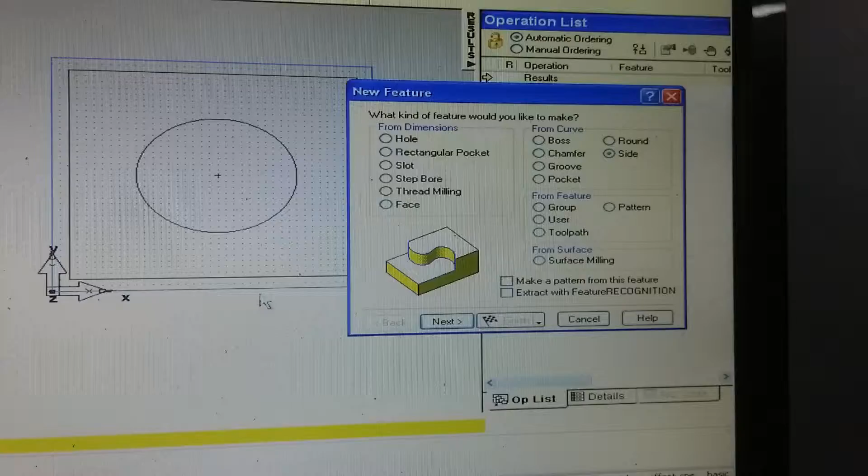Right, like I said, you're going to create a new feature. It's going to be from a curve because it is a curve. I mentioned earlier about doing a groove cut, which you could probably do, but a side cut is essentially what you want to do on this one.

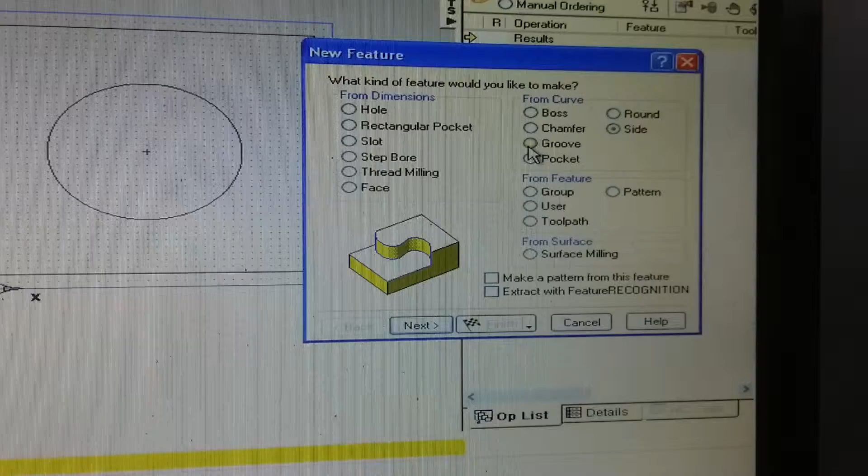It will allow you to use a regular end mill, because when it's cutting a groove, it's thinking it's going to be engraving or cutting a keyway. So click on the side, click next.

Now this is asking you to pick what you want to cut. So you click here, you click on your circle, it highlights it green, okay? It calls it circle 4. I don't know why, but you can rename it whatever you want.

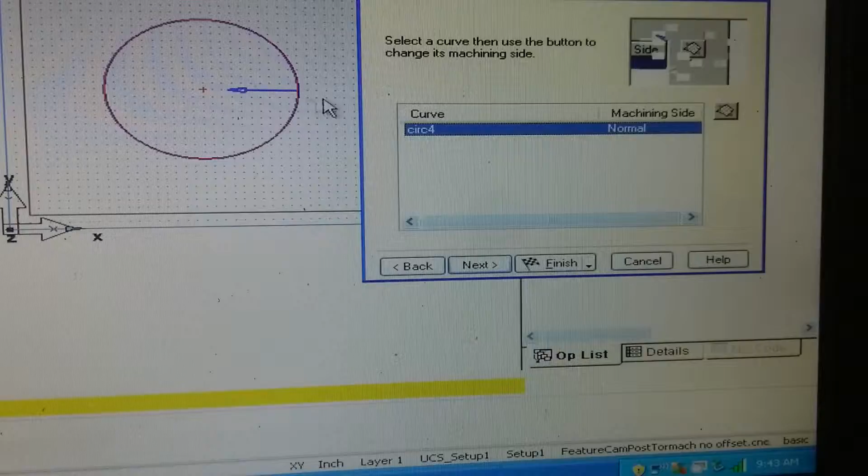Okay, so click next. Now this is the machining side. Which side do you want to machine, the inside or the outside? You want to machine the inside because you're looking to keep the outer piece. The inside of the circle is what doesn't matter. So click next.

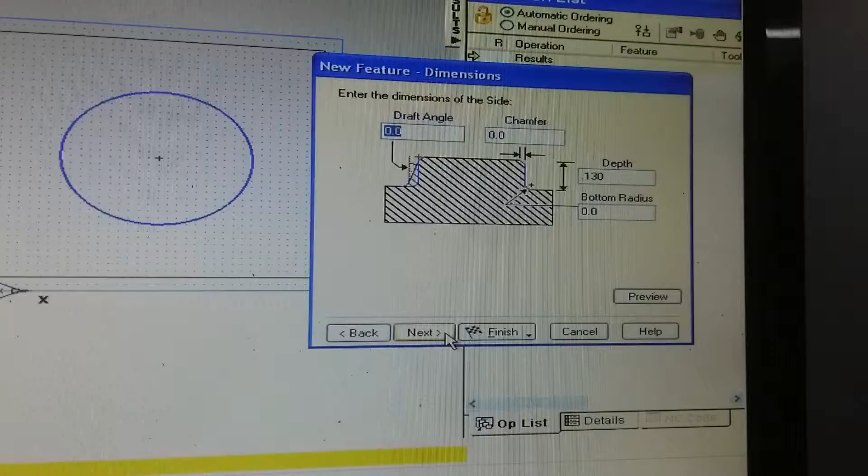Okay, the offset, the Z location, always leave it 0. Just zero your Z with your cutter. Draft angle, don't worry about it. Chamfer, don't worry about it. Depth, like I said, it's 125 thousandths thick plate, so you want to go all the way through, so you can pick 130 or 150 thousandths, whatever you want.

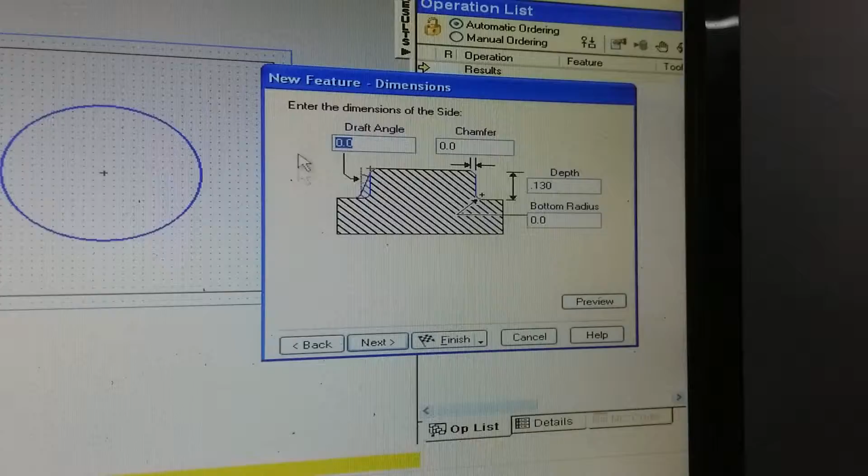I typically would set up this type of cut on top of a piece of wood, clamp it down on the table, that way it can cut through without damaging anything. So I'd set that at 130 or 150 thousandths, whatever.

Click next. Something this easy to cut, this is basically how do you want to make this cut. You want to use a climb mill. You can do all kinds of stuff on here that you probably will never ever need. I typically leave it as a climb mill.

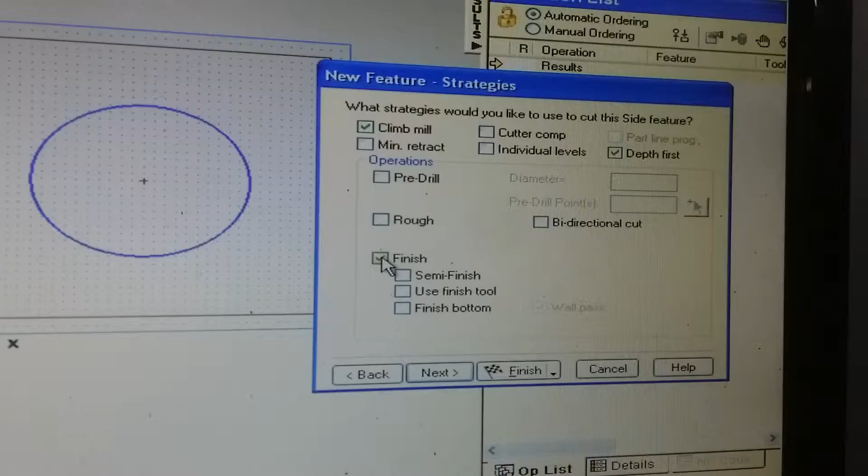Something this thin, I don't need to do a rough pass or anything like that, so I'm going to click that off, click the bidirectional cut off. So I'm just going to do it with one pass, finish cut, and I'm going to click next.

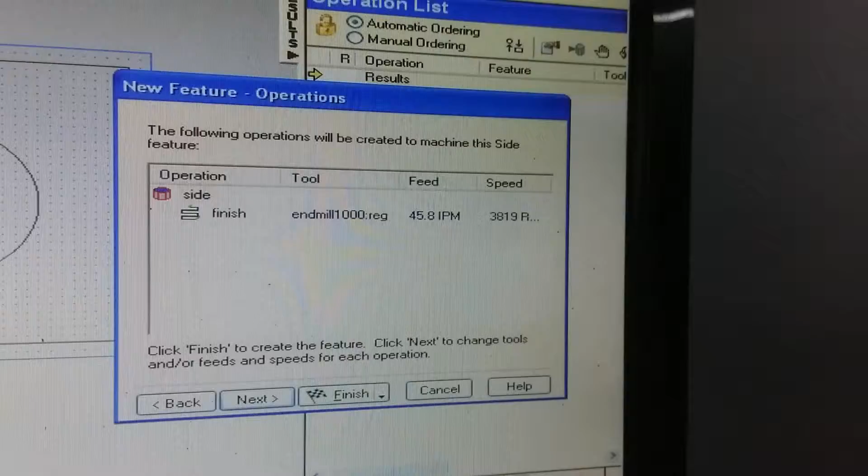Okay, now this is where it's essentially done. If you wanted to click finish, you could, but you would be using whatever tooling that they applied to do this cut. Now, for whatever reason, they have picked a 1-inch diameter end mill to do this. You could certainly do that with a 1-inch end mill.

With our machines being as small as they are, we would never use that to do this little light cut in aluminum. So what I typically do, instead of hitting finish, you want to go hit next, and it'll allow you to select the tool that you want.

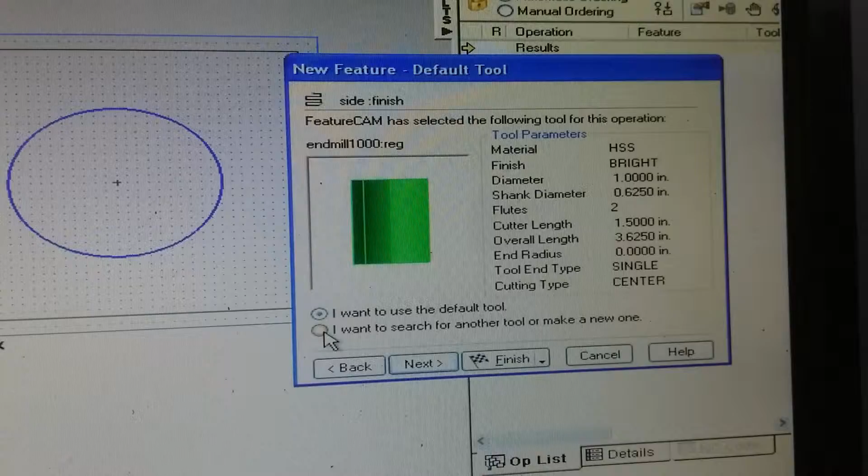Okay, so you click, I want to search another tool or make a new one. So you click that, you click next.

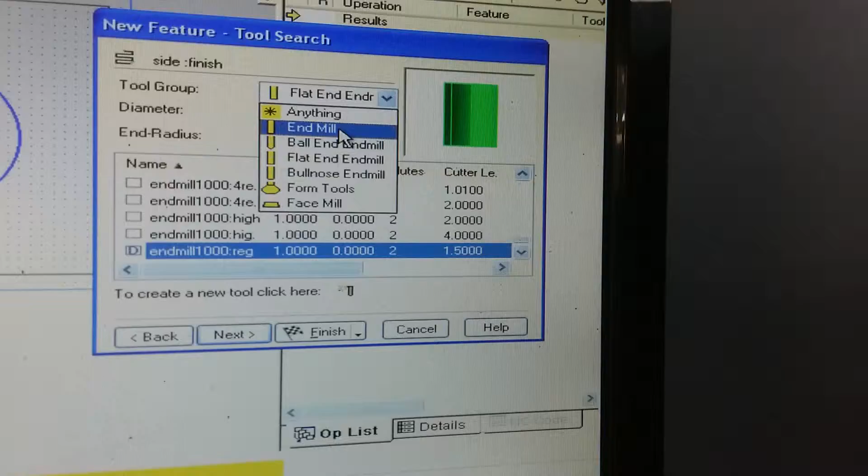Now it's got this gigantic list of all sorts of stuff that's already loaded into the program. This is in the tool crib, essentially, that's loaded in the program. It's got pretty much everything you'd ever use. You can pick from this list if you have tools that match it up, or you can add your own tool list. I'm going to pause for a second and start another video.